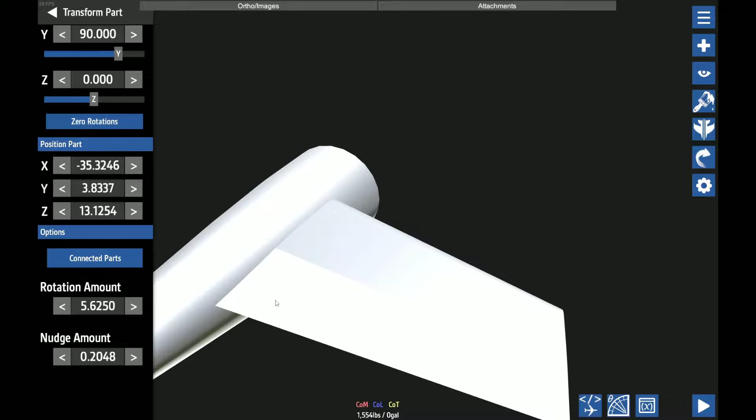So now, the first step, adding a control surface. Well, actually, first of all, I finish it, because we want to obviously get rid of this end here. Now, on the SWL-120's main wings, I obviously have that little winglet, but horizontal stabilizers, especially the tail itself, do not have that. Instead, we're going to just round it off.

We are going to have to redo the trailing edge piece that we just did. We're going to have to redo the rise and run, well, not really width, but rise and run. We're going to have to redo them for every single section that we're going to add. Because we're not evenly tapering it off, like if you're just adding a section to it, then we'd be tapering it off at the same amount. But since this is the ends of the wing, it's not going to be tapering off the same way.

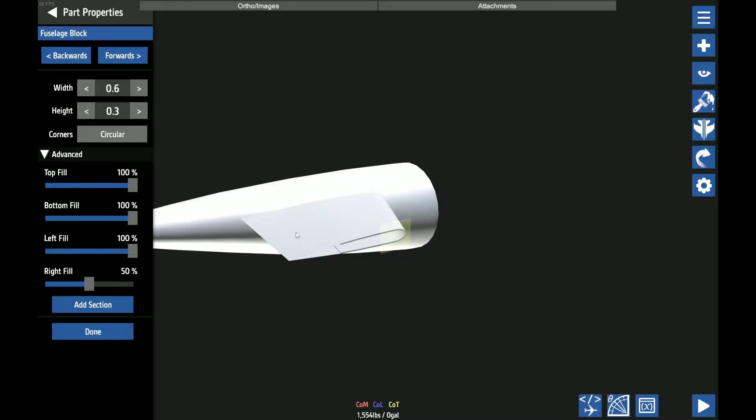The first thing I want to start with for this is a smaller section, like about that. Not that much rise. So we're going to start with this, and then I'll just add a few more sections until it's tapered off.

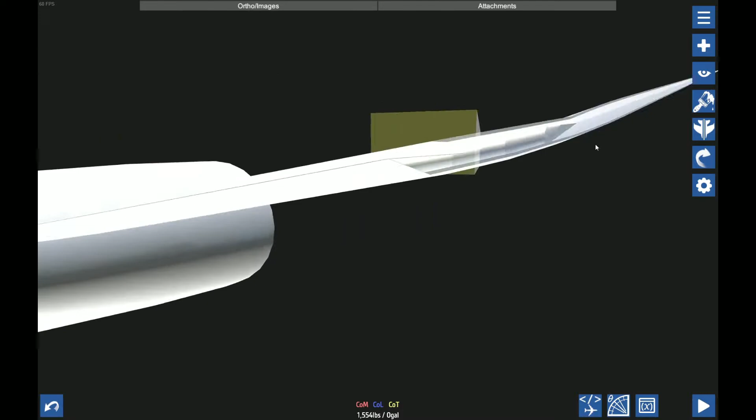So after some time, I've come up with the front part of the tip. However, that has had some problems with me trying to make the back of the tip because of how the height makes the width of the trailing edge, and therefore instead of just going out to here like I was hoping for, it instead has to go in and then does some weird stuff, then comes out or something, which is not ideal.

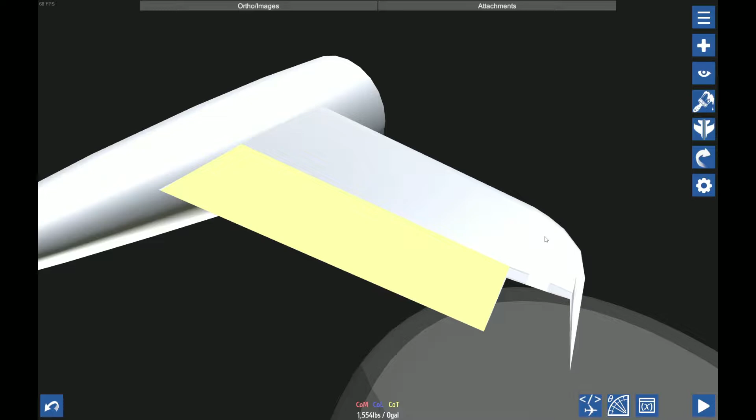I'd say for beginners, just ignore this tip of it, because this is going on the SWL-120. I will put this tip in, but I just say ignore if you're just learning. I focus more on the control surfaces and the actual wing, not so much the tip. Also, another important bit which I almost forgot, make sure to turn smoothing on, because you can see as I'm turning it on, it makes everything smooth.

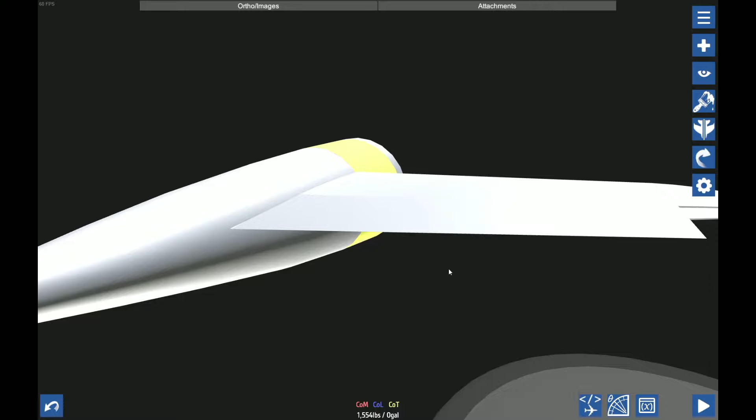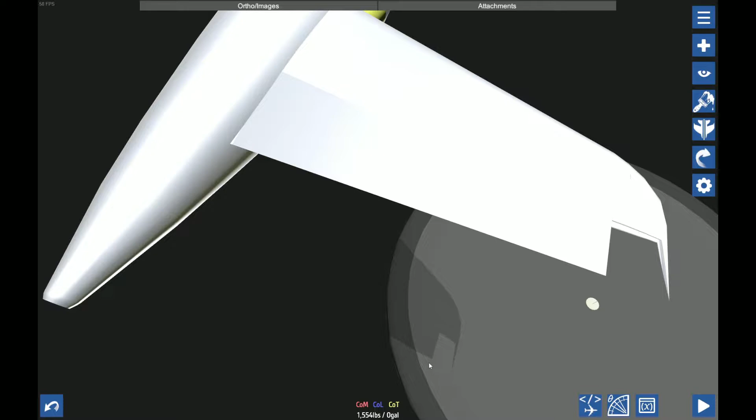Now, for the actual control surfaces, for a main wing, this will actually be flaps, and I guess there will be the aileron, but in the main wing it will be primarily flaps, which is the most difficult bit. Flaps and spoilers too. Now I may make a video on how to do that, but in this video I'm going to focus mainly on just making a control surface. However, for basic flaps, it's sort of simple, and actually I'll show you how you can easily add flaps to this wing after I make a control surface.

So first, figure out exactly where you want to put your control surface. For me, I want to put mine the entire length of this main segment, because it still has the tip to have some space, and according to my blueprints, it pretty much just goes right to the base of the tail. Really the base of the horizontal stabilizers.

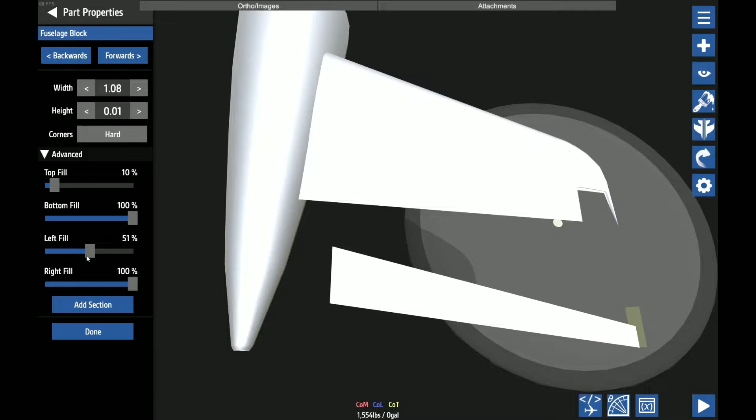What we're going to do is duplicate this top bit, and I'm going to slice out about 30%, well actually I think 31% of the leading edge. And then for the bit that's still on the tail, we're going to leave that there, we don't need it now. I'm going to remove its connection, that way we don't affect the base airfoil. Then we're going to slice out 69% of the trailing edge, which means our fill should actually be 31%.

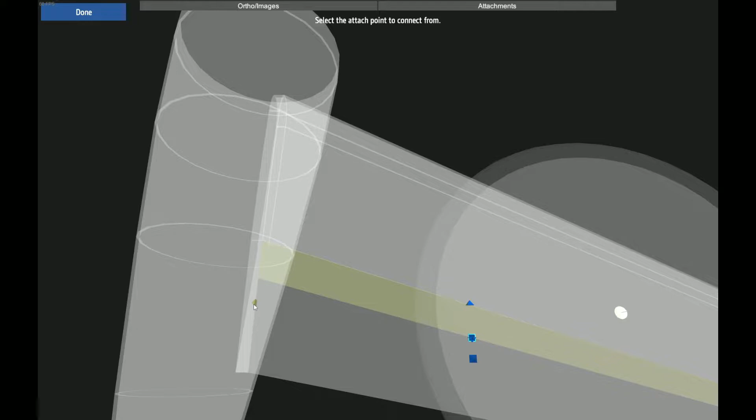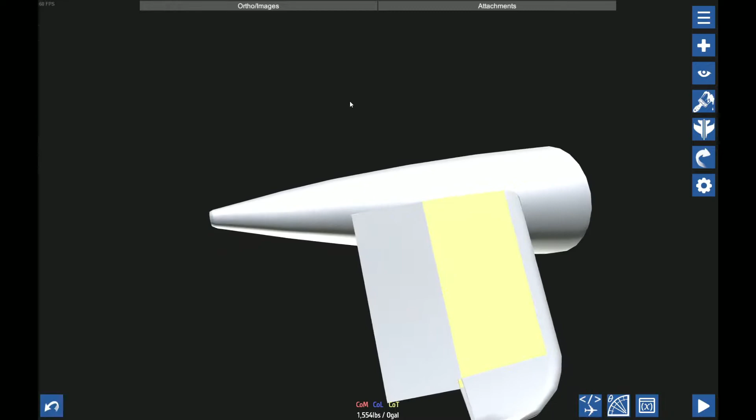And then since this bit is actually staying on the tail, we're going to re-add its connection, then we have this bit. These two show the exact same coordinates, so if I were to select this one, copy its position, paste that position in the other bit, you can see that it perfectly matches up, so you wouldn't even tell this is actually two pieces. Now going to nudge that out. I'm going to do the same with the bottom.

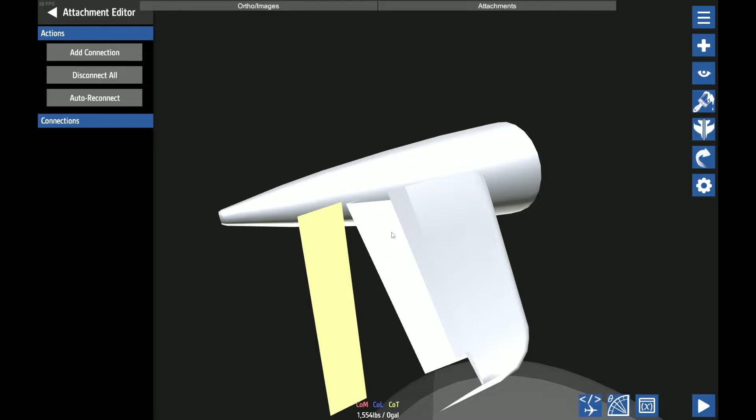Now, one thing for a semi-symmetrical airfoil we will have to do, really it's safe to do for any airfoil, is before we slice out the bottom bit, we're going to first make the leading edge of the actual control surface. Not the leading edge of the wing, but for the control surface, because the control surface is pretty much an airfoil in itself. So it's sort of like a wing within a wing, if you can understand that.

I'm going to start with the leading edge of the actual wing. I'm going to make its position be the same as the other part of the control surface. I'm just going to use the piece itself, not a copy of it. And I'm going to start with the base. Actually, I'll do the tip. So what we do is I'm going to go into orthographic side view.

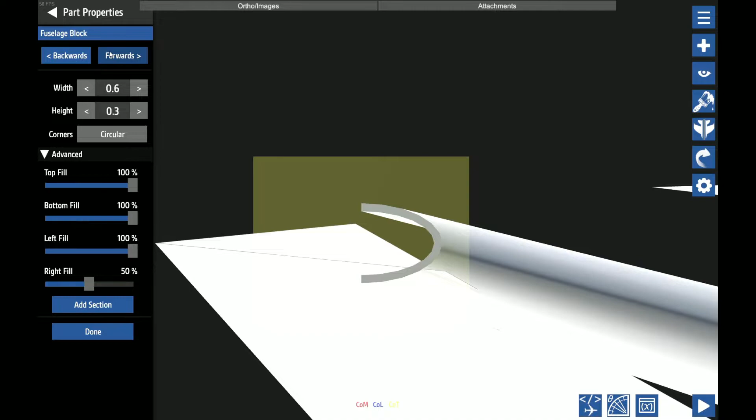And for control surfaces, now we could actually use the 5-part airfoil technique for the control surface too. However, for simplicity, and because it's what I've done in the past with the original wings, I'm going to leave it as 3 parts. Because you're not going to have a control surface within a control surface, right? Actually, we could technically use the 3 parts airfoil technique for this wing as well. However, my 5-part airfoil technique is better, because it gives us 2 flat pieces to work with for control surfaces, instead of having to figure out how to cut out the control surfaces from the 3 parts airfoil.

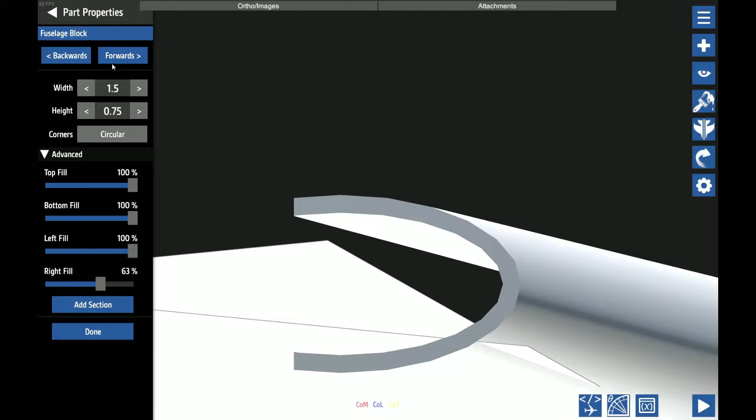So we're going to make the fill be 65, I think it's used in the other. I think 63 will work. That way it just has more of a round, because it doesn't just be at the front 50% and then immediately angle down in the trailing edge. 63 and 63. Then, since we're in orthographic side view, we want to try and align this corner with this corner here. And then we're going to nudge it up so it looks like the control surface bits are roughly halfway inside it, really roughly in the middle.

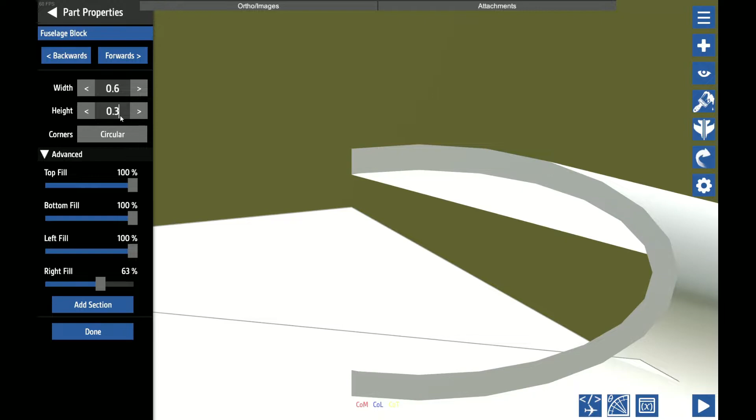Then we're going to decrease the height. We're going to deal with the width later because we want the width to be exactly twice as much as the height. And now I've done the height, I can change the width. And then we can nudge this back in place. And I'm pretty sure with the lower section of the airfoil, because it's a symmetrical airfoil, we can simply just make its fill be exactly 63%, and that will be perfect. Just like with the top, we can make the copy's position be the same as the existing one's position, like that, and then nudge it back.

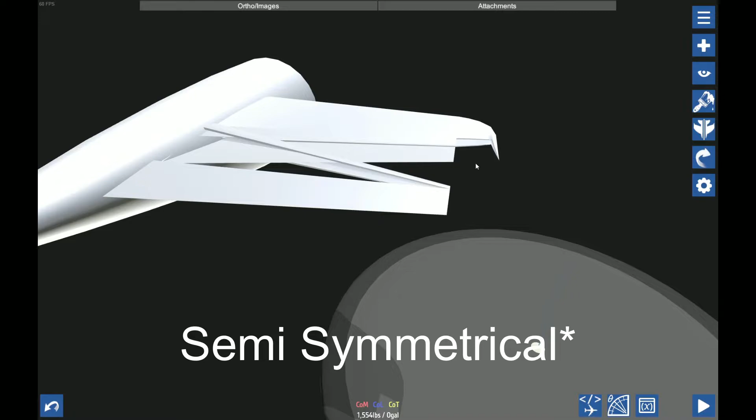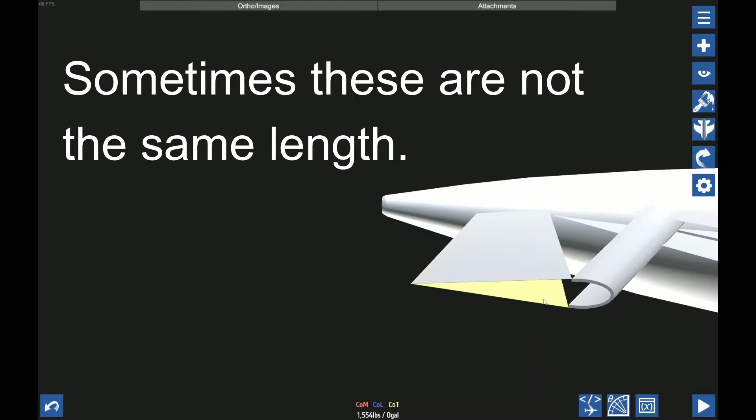And yep, like I thought, since this is a semi-symmetrical airfoil, 63% is exactly the right percentage for the top and bottom. The reason it's not the same for a non-symmetrical airfoil is because, like I was showing you before, the width of the top middle piece is not the same as the width of the bottom middle piece. So basically, with these 2 trailing edge pieces, the bottom one is longer, like the width of it is longer than the top one. I just want to make sure of how it's connected.

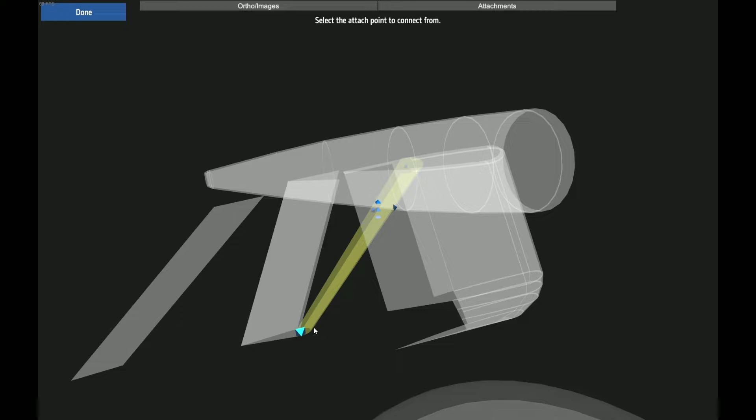We don't want to have any floating bits without a connection, because of what will happen. Let's say I have this bit here, if I were to adjust the run. Actually this isn't connected either, I just want to connect it by the tip, because that's what we've just finished. So the run of this is adjusted from the tip, not including the tip, that way the tip stays in place. But also, you can see this piece with no connections does not move at all, which could mean it will easily become out of place if this was an important part we had fine-tuned into place.

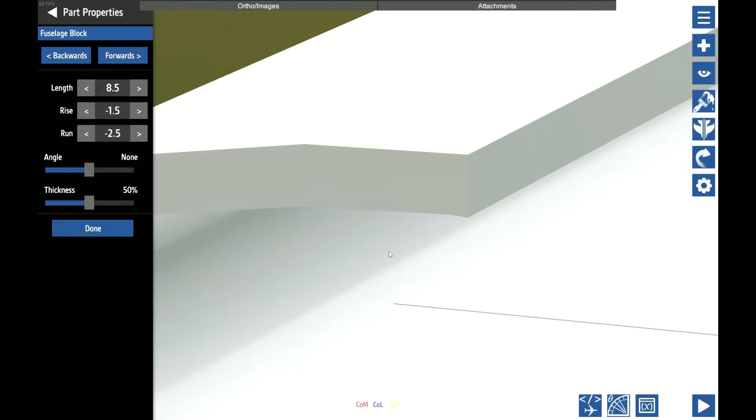So we've done the tip, now we're going to do the base. Because of how orthographic side view works, we want to avoid clipping, so we're going to have to nudge all the parts to the other side of the map. Not really map, but the other side of the designer. That way there should be no clipping, and there's no clipping. Okay. Now we are going to adjust this. We're going to start with the rise. So actually, first you want to make sure the run is correct. So I just use a bit of rise to get it into place. Then I can adjust the run until it is perfect. This will take, again, more fine-tuning.

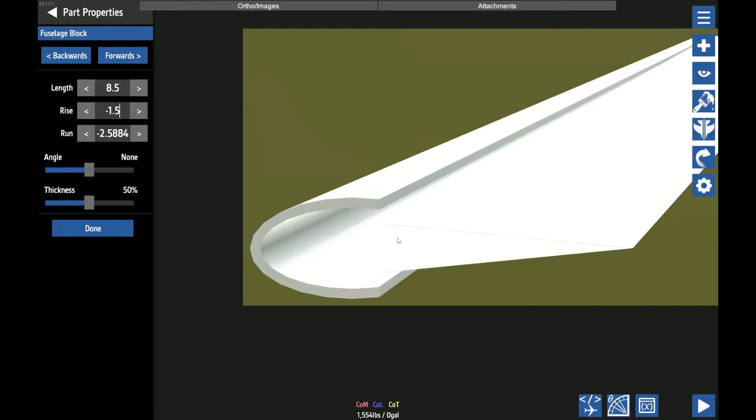Then I can adjust the rise until the trailing edge of the airfoil is exactly in the middle of the leading edge. And then I can change the height of the leading edge, similar to how I did the tip. Actually, I seem to have got it perfect without much effort. Now I can just change the width to be exactly twice as much as the height. Then I can use the run to nudge it back into place. And done. So that is our airfoil.

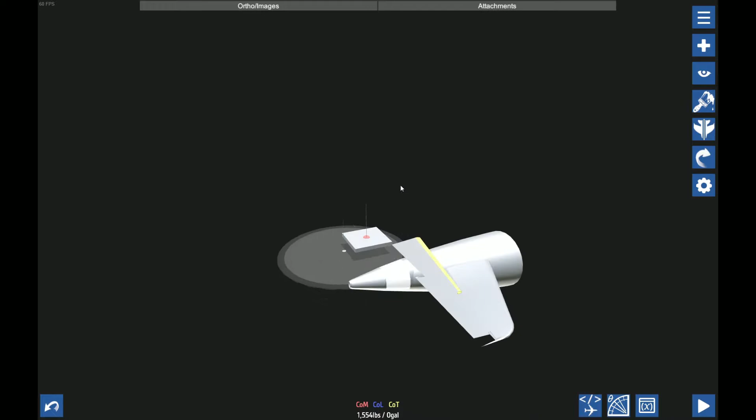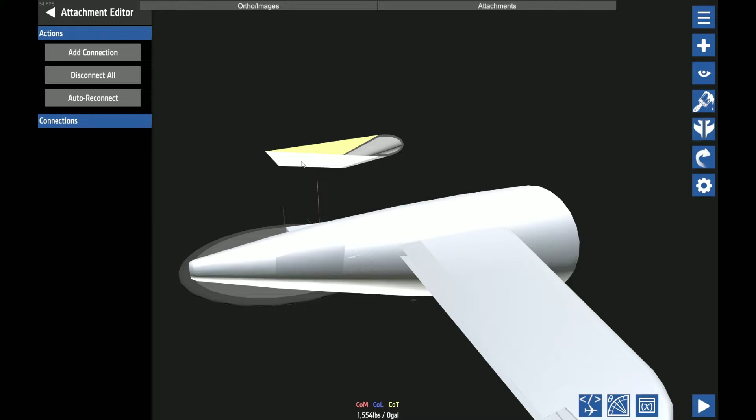So now we can just cut out a percentage of the bottom part of the trailing edge, 69%. Well, actually that would mean it's 31%, so fill percentage is 31%. And then we can add its connection back. And now what I can also do is remove all the connections from the airfoil's parts, and then add them to the leading edge. So that way I can use the leading edge to move all of the parts in the airfoil. Then I can nudge it back into place.

Now having this control surface is great, but what makes it rotate? Well, we need to add a rotator. And also, the thing with having the fill percentages as they are, making the control surface perfectly flush with the wing so there's no gaps or seams, so it's completely seamless. That does have an issue where if we rotate the control surface, part of it will clip through a bit of the wing, and because of that we need to actually cut out part of the wing right in front

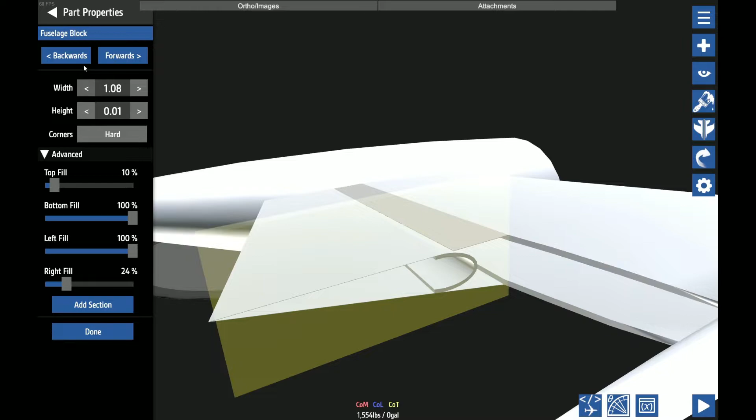of the control surface. To take this bit, I'm just going to move its connections again, and then what we need to do is cut out a bit, I think fully 24%, so for that, it just needs to be enough so when the control surface is fully deflected, say up, it just is about to start clipping with this highlighted piece there. So with flaps, we don't need to cut out the top bit, we just need to do the bottom bit. However, for control surfaces that rotate both ways, we need to cut out both sides.

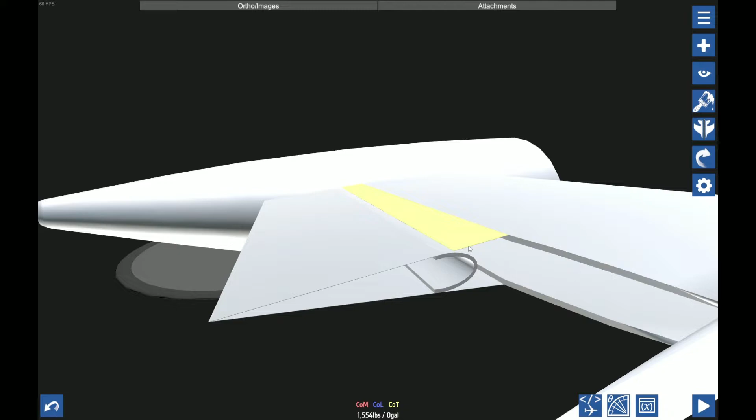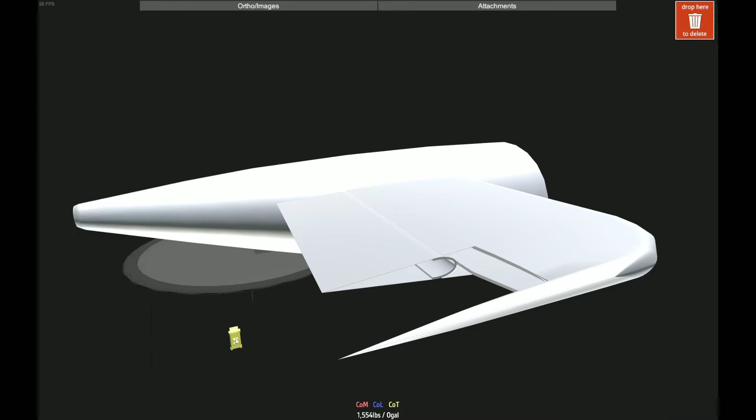So I'm going to start with having the fill percentage of the bits in front of the control surface to be 24%. Actually, I can just overload that, so instead of playing around with the connections, I can just make it be 24%. So now we're going to add a rotator. I'm going to use a hinge rotator. It's going to add a bunch of parameters to it. I'm going to make this be pitch. In joint rotator, I'm going to just make this 45.

Now, some of these values I can adjust in the settings, but I just prefer to do this all at one go and overload. This is actually going to be 0.7. I'm also going to disable the base mesh. This just disables some decorative 3D mesh on the rotator. We're going to set this to true. You can see it no longer has the mesh around it. And actually, for our purposes, we do want this to be on, so I'm just going to get rid of that. Now I just need to nudge it about in place.

And actually, now that we're done using orthographic view, we can nudge all the parts back together. I'm just going to finish adding this rotator. So I want to nudge it to be just, and actually I'll make it be the same position as the leading edge, so same height and the same z-axis and the same, what is it, length? I guess it is length anyway. So now it's in there.

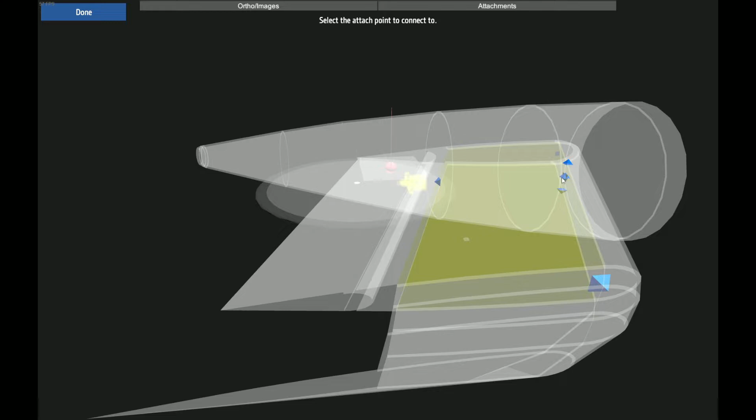I'm also going to just quickly add some connections, so I'm going to connect it to, I'll say the middle piece, and I can also move the connection of the leading edge to the wing and make the leading edge actually connect to the rotator. And I'm just going to make all of the locations of all the different parts the same, so all the parts aren't spread out. Now I have a rotator, and without changing anything, let's see how it runs.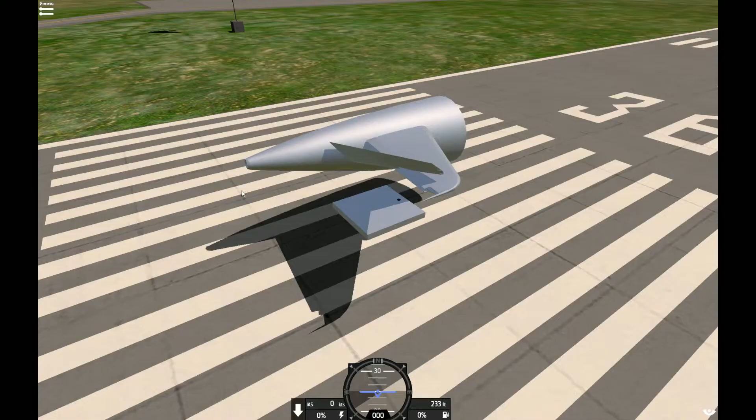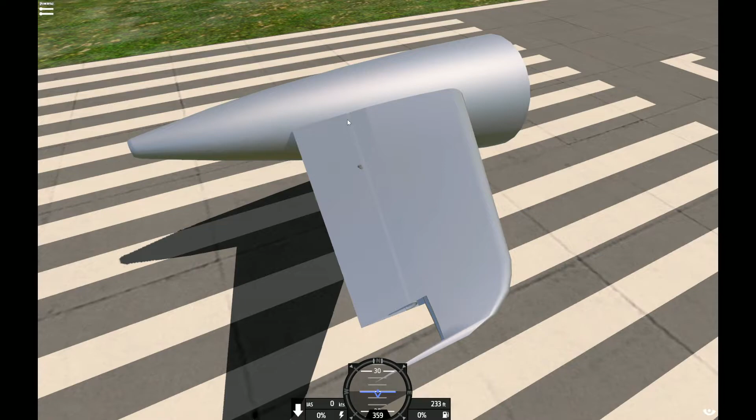So you can see already this is not the behavior we want. We need to rotate the rotator on, I think, all 3 axes, well actually just 2 axes, to avoid this weird behavior where the control surface does not rotate how we want it to. And also, a bonus on the first try is it does deflect the way we want it to. So let's say I want the plane to pitch up. The expected behavior is the control surface deflects up. And that does happen here, so I don't need to change that simple invert. We do need to fix the rotation axis. We want the rotation axis to be the same as the imaginary axis that the leading edge follows. But we're getting there.

So far I've made a wing, a basic control surface to go with the wing. I've also decided to attempt to make the edge. But I think for beginners we should focus on the middle part of the wing, which is really the main part of the wing, and control surfaces.

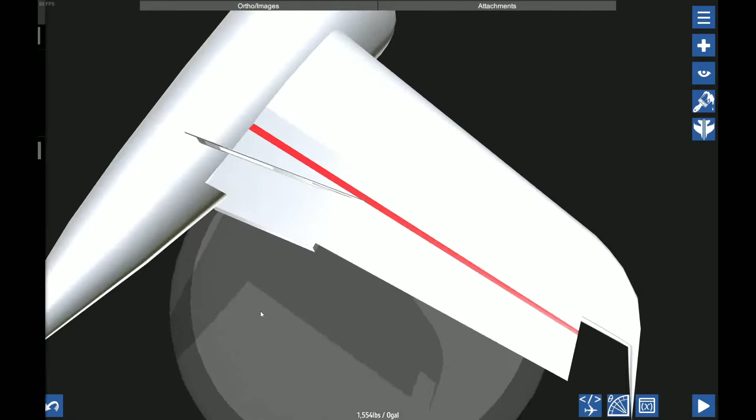So let's fix that axis. We want to scale up the rotator. We'll just try some values. We don't want it to be that. Actually that can be 0.1. Let's try this one. That's what we want. So let's make this one actually be more like 20. Right, so this is our axis. I'm also going to quickly just paint the leading edge red so we know exactly what we're rotating it to.

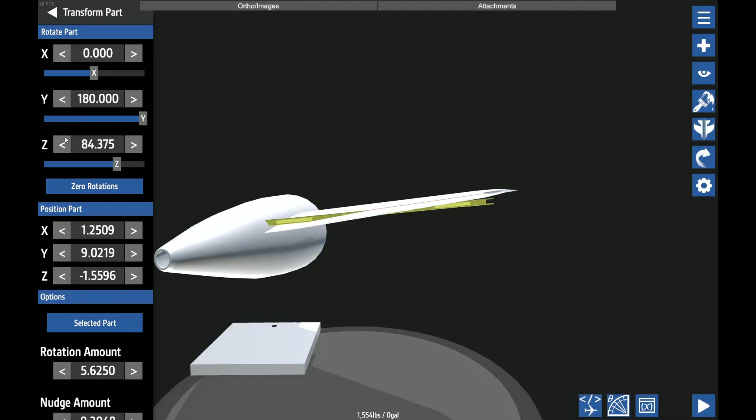There are 2 parts you want to rotate. First you want to rotate it. I'm just going to quickly try that now. You want to rotate it so the Z rotation is as close as we can get it to the same axis as the rise of the wing. I'm just going to fine tune that. We're going to use smaller and smaller rotation amounts as we zoom in. I want to try and get it as close as we can. About that. And actually let's see how it lands in the level. It doesn't look much different.

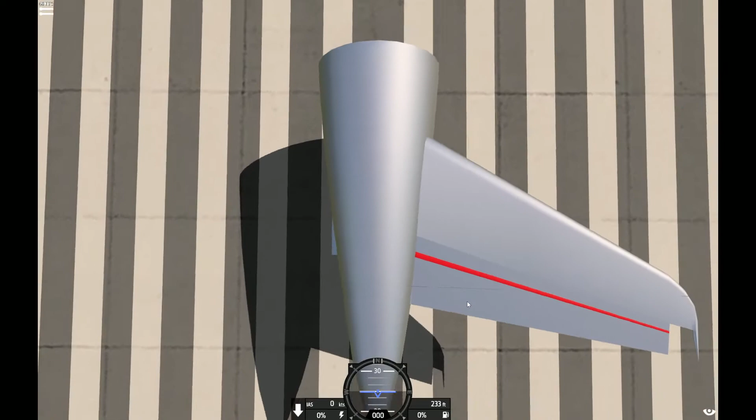Actually I can't tell any difference. But that one step has done part of it, that's part of the step. But it's mainly fixing the other axis, which is to make this edge be about here somewhere. So go to the top view, select the rotator, and we're going to use the y-axis. The x-axis is not an axis we need to tamper with. We're going to use the y-axis and z-axis.

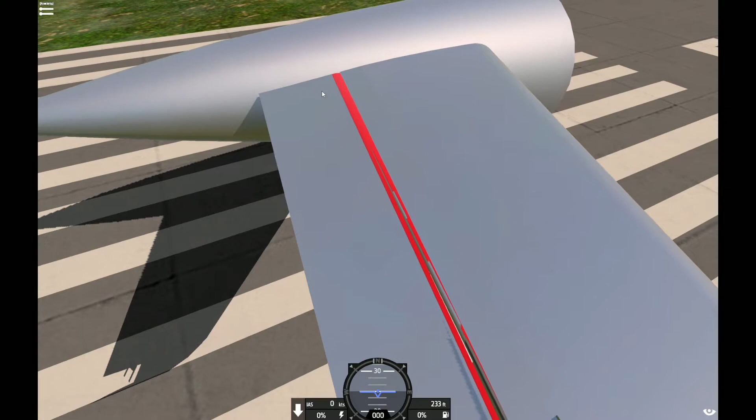Let's try that. I don't think that's 100% done. Let's just see how it went. Much better. Does need a little bit more fine tuning, but yeah, this is much closer to the axis we want it to rotate on. And actually, what we really need to do is just move the rotator forward a bit. But we do need to change its rotation axis a bit. I think we need to move this end back a bit. I'm also going to move it forward a bit. Much better. We do need to fix that clipping there, so we need to move the rotator forward even more.

It's still not perfect. You can see at the base it's exactly how I was looking for, but on the tip there was quite a big gap. Just needs more fine tuning. Yeah, I've got pretty much a control surface. Gonna go and keep fine tuning that. A few minutes later, and after a lot of trial and error, now this. It could probably be improved a little bit more, but I think it's good enough. I guess I could just do a little bit of clipping. Yeah, the bottom needs to be fixed a bit.

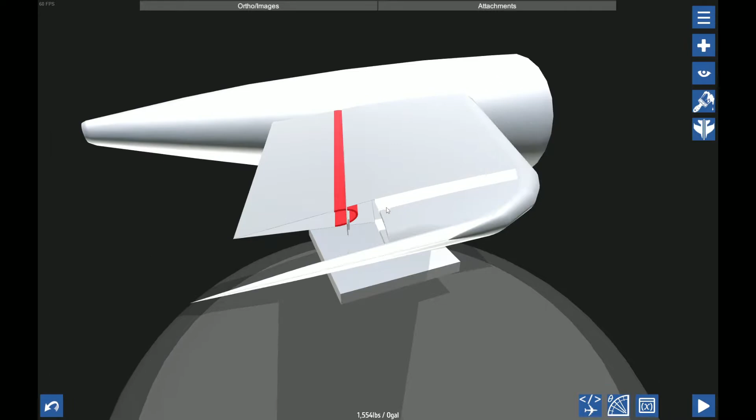And also, I want to explain how we're going to cap off these ends so it doesn't just look like a hollow piece, and also how we can add some more parts to make it look even more detailed. So 22%. So I'm going to do 22% on the bottom as well. I can also make this not red. I'm just going to paint this completely white as well.

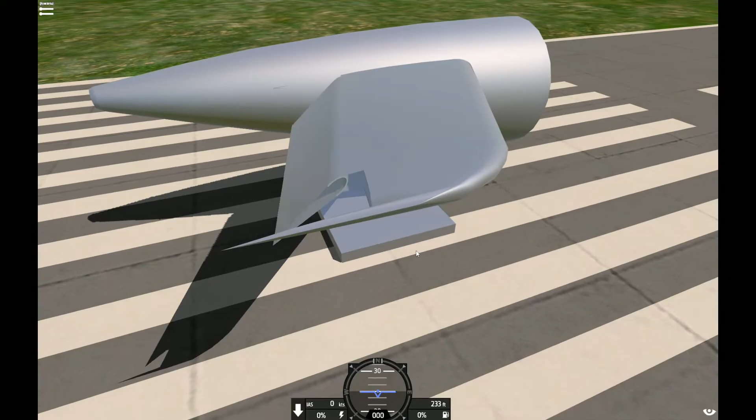So in this rotator, we can now make this 0.1, 0.1, 0.1, and then disable the base mesh in the joint rotator category. I don't think the rotator will be showing its mesh because it's so small, but either way I just want to have it disabled. So you can see it's right in there. And there we go. What I will do to make it a little more realistic is first I'll make its range more like 35.

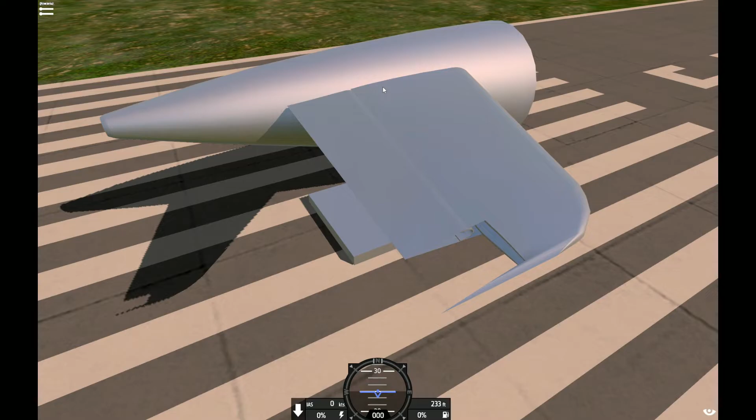And also add another category called damper multiplier. I'll set this to 10,000. I think 1,000 will actually be better for the damper multiplier, but we'll see. Yeah, I think 1,000 will be better, so I'll just set 1,000 for that. Yeah, this looks much better. So actually, I'll set something like 3,000, not 1,000. Yeah, much better. So there we go.

It's not done yet. The control surface is sort of done, but we just need to add some more parts to it. So we're going to cap off both ends of the control surface. We're also going to add a small part which really just walls off the hollow bit of the wing in front of the control surface. The caps are relatively easy. We're going to start by getting, I think I'll take this piece. We're going to rotate it so it's lengthways with the actual fuselage.

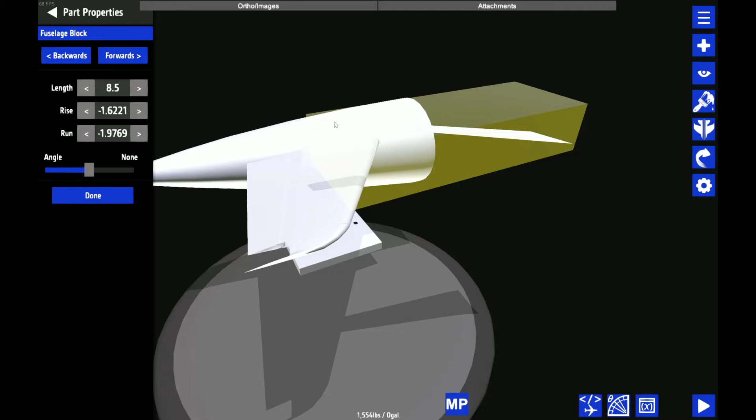I'm just going to take off the visor. We want the width, so actually we want the fill. I'm just going to set the fill. So we want all these fills to be 100% for now. The width we're going to make as thin as possible. I'm just going to set the height to 1 for now. The width is going to be 0.01.

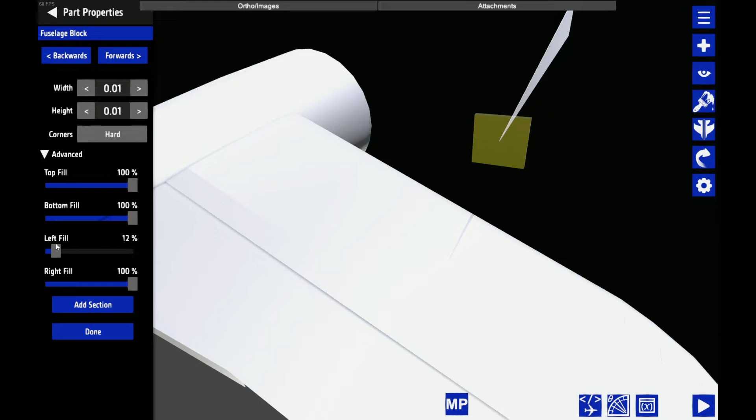Then I'm also going to use my trick to make it even thinner. This is the wrong way. So the left fill should take off the left side. Right. I'm going to take off 90% of the left fill, making it 10%. Same for the front. I'm also going to roughly scale it down to what I think it's going to be. So 1.1. Front height can be, I think, 1.0. So you want something like this.

We're going to, of course, change the look of this again. Basically, I just want to have this, and we also want to make sure there's no other rotation. Basically, a blank flat piece of fuselage like this. Now we're going to nudge it into place. And before we add this piece to the control surface airfoil, we also want to cap off the leading edge of that control surface.

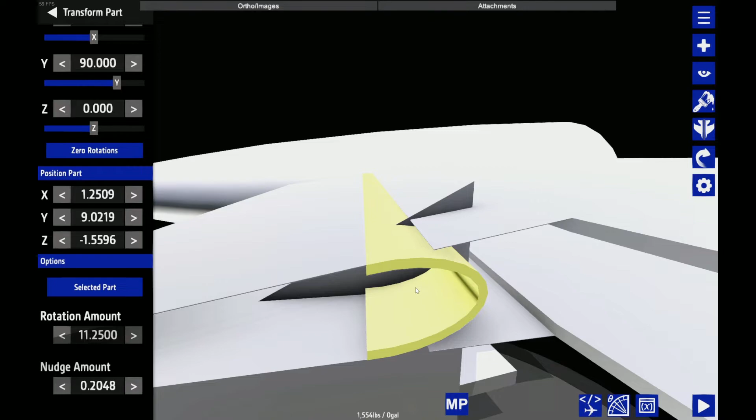Now we could use this piece and keep adding a few more segments, but there's an even better way to do this. We're just going to go into overload after selecting this leading edge. Then we're going to change the part type to be fuselage body 1.

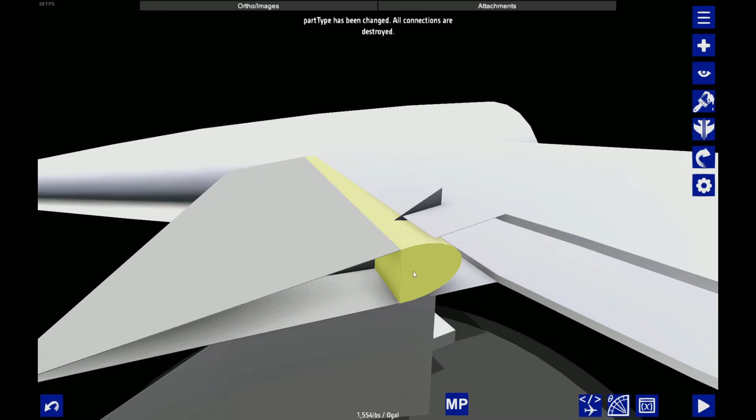And then it will be filled in fuselage and not being hollow. We also fix the connections because it'll erase all the connections. And done. So now I can focus on this triangle piece. I want to first nudge it out to the right position. So about there.

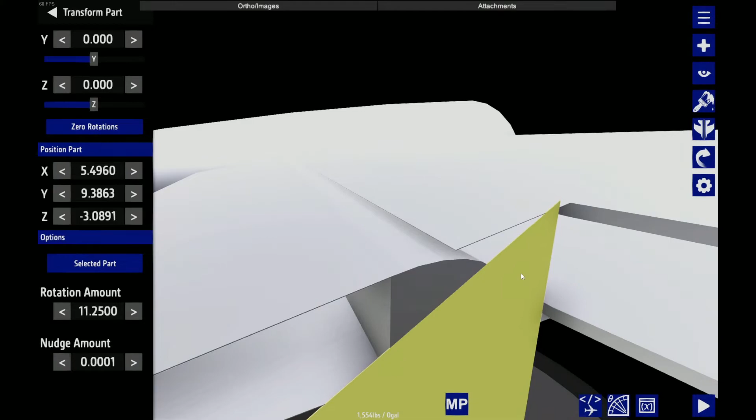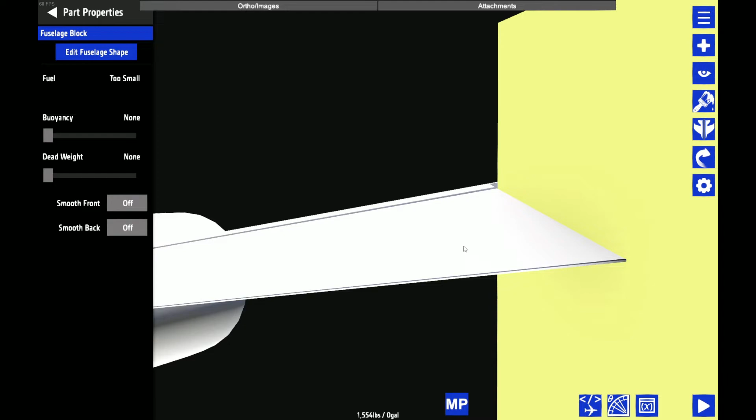Then I'm going to nudge it back until the front part, or the front edge, is in line with the back edge of the leading edge. About that. And then I'm going to make the Y position so it's just in the middle. It doesn't have to be exactly right, because even though we still want to be relatively fine-tuned, there's still the slight edge of the two rear parts of the airfoil, these two pieces here. So even though they're meant to be thin, they still have some thickness. So there's some room for error.

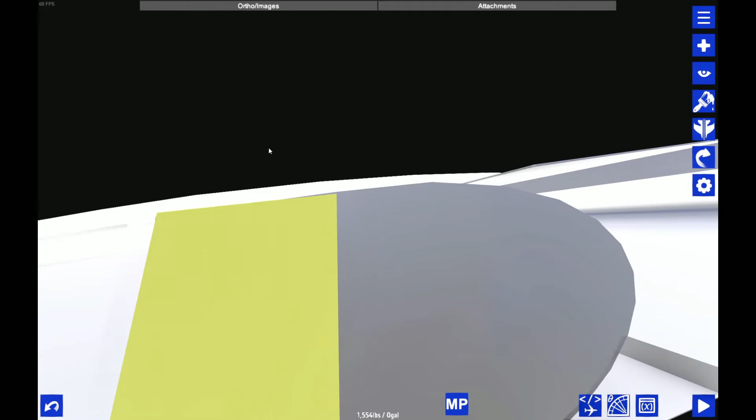So I want the height to be something like, not 1.1, 1.4 for now. And we can nudge it up, then fine tune it again. This is good enough. You can see there's still some slight difference between the height of the front part of this cap or end and the actual part of this airfoil here. But since there's some thickness here, it doesn't really matter.

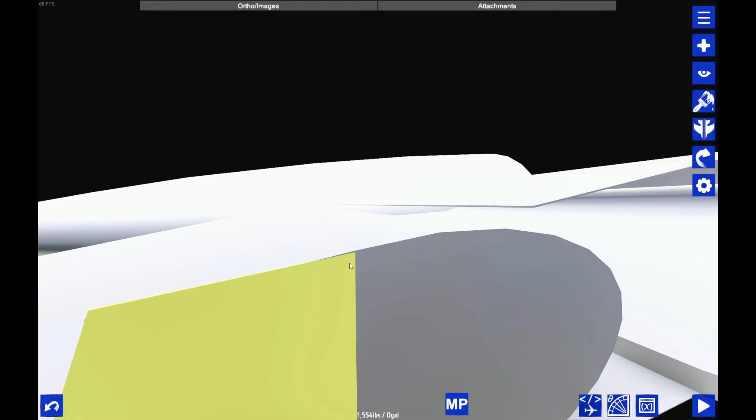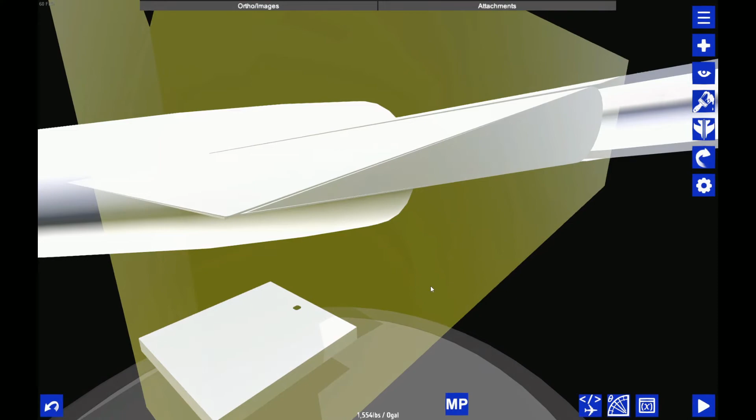Now we're going to add a connection. We're going to add the front connection of this end to, I'm going to say, the leading edge of the airfoil. And then we're going to change the length, and also going to use rise. The length will again need some fine tuning. I think we don't actually need to use rise, because this is a symmetrical airfoil. So there we go. So that's the right end of the airfoil.

It also needs to do the base. The base is the same idea as the end, so I'm going to do that off camera. 11 minutes later. And done. So that's the airfoil side of... Where did that go? Oh, I forgot to nudge it up. Anyway, so that is the control surface side of finishing up done.

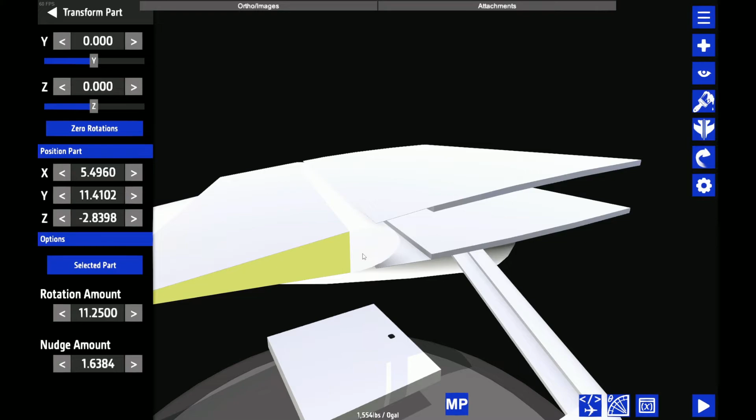Now I need to cap off, I think I'm just going to call it the inside of the airfoil from the outside. The way we're going to do this is first we're going to nudge, I guess we can nudge that up. We want to create an extra bit of cap, which is in here. But wait, first we're going to just make this part of the cap. So we're going to duplicate the leading edge of the control surface. We're going to make it back into hollow. I'm going to start by making it the same position as the actual leading edge.

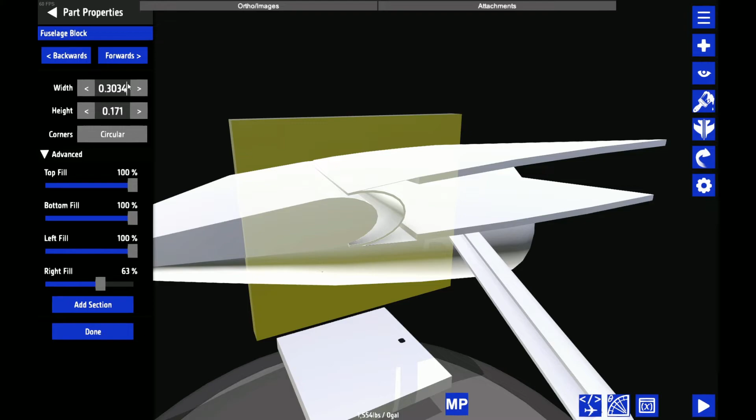And then we're going to nudge it forward until the back part of the new leading edge, which isn't actually the leading edge, is in line with the back part of the wing itself. Then we can adjust the height. This will again take some trial and error until it is flush. We're going to have to modify the base. I'll just do that, just a sec. And we can also actually take off part of the width of the end of it, so the tip, because we don't actually need all of that. So like this, I can nudge it back, like that. Hopefully you can see what I mean.

I also need to do the base, so I'm going to add a connection of the tip to, say, this part. Then I'm going to go to the base, and now I can use run. So first I'm just going to the base. I'm going to get rid of some of this width. Then I'm going to use run to adjust it there somewhere. Then we can increase the height a bit, and then we can change the run again. And just about done.

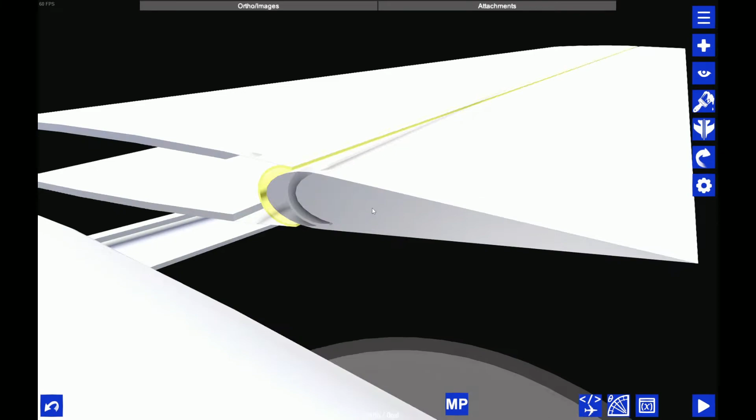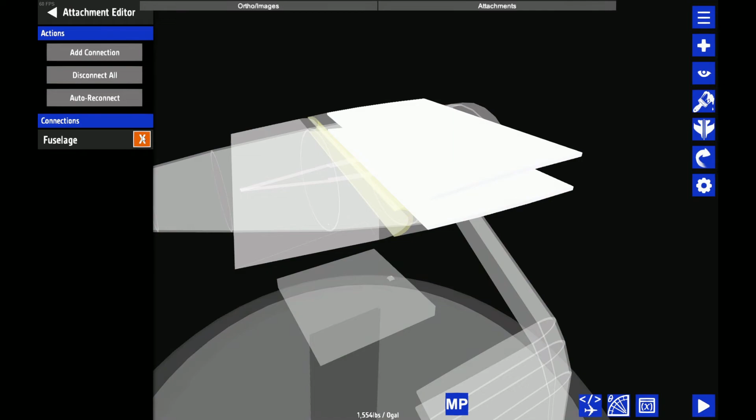Now I also need to cap off. Actually, I don't think we need to cap off anything. Now I do need to add an extra cap for this part, which isn't actually there yet. And we also need to cap off some other stuff. So let's just see how this runs in the level, like how the control surface rotates. It shouldn't clip with anything. That's pretty good.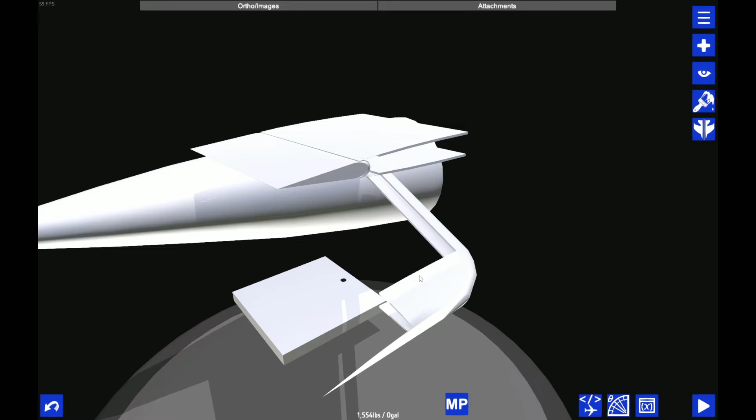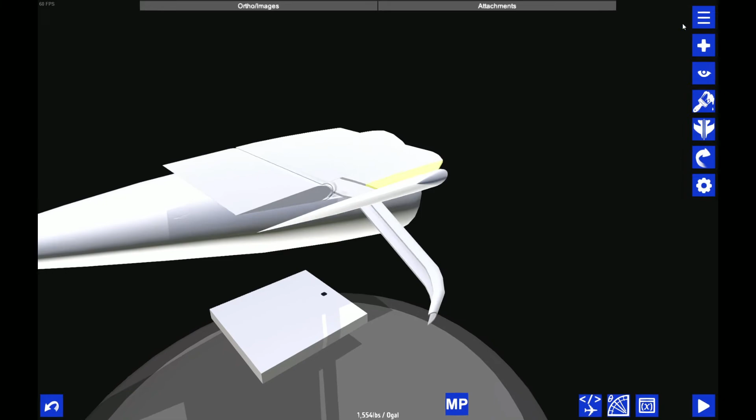So now I can move on from capping off the control surface's airfoil to the main wing. So see this bit here? So instead of this being hollow, we want to cap it off, similar to what we did in the base. One thing I also need to do is finish off this tip. I haven't done it because it's a little advanced. Like, not advanced, but it just takes a lot of trial and error. Because the height of each piece determines the width of the two back panels. So I'm just going to do a lot of trial and error. Many minutes later. And complete.

So now we're going to work on those actual caps. So what we're going to do is first nudge up some of the other parts. Then we're going to duplicate this end piece. We're going to make the positions identical. Then we're going to nudge the new piece up. We're going to set its back connection point to be, I don't know, anything. It can be anything. I'm going to say there.

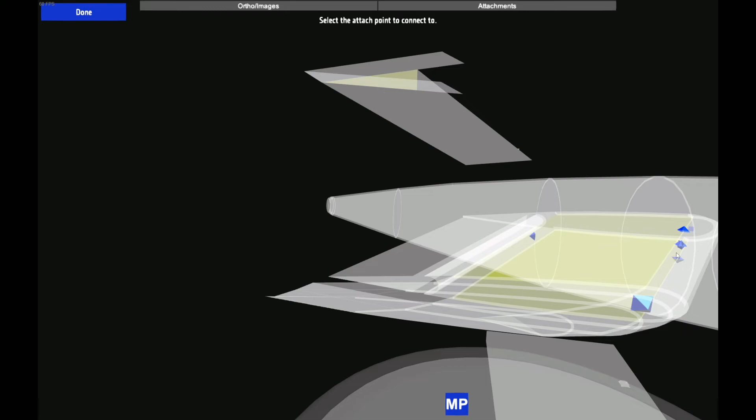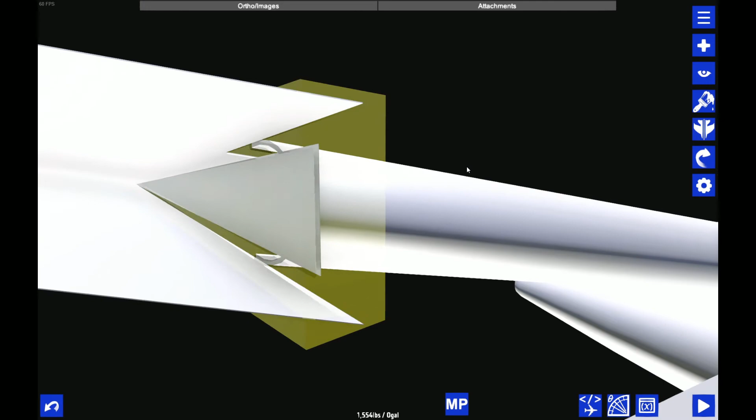And then what we're going to do is we're also going to get out this piece. And then we want to just extend this cap to be past the front bit of this other... There's probably names for all of this. Basically, we want the front of this piece, like this, to be past this piece. Then we can just adjust the height a bit.

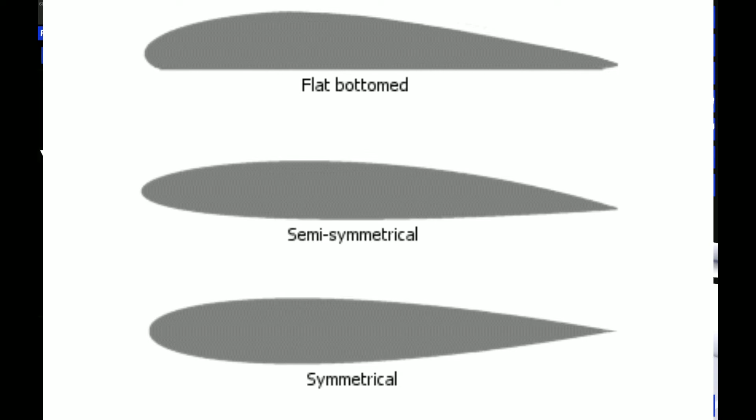Going to nudge up these two bases. Going to duplicate the other cap. Set its position to be the same. Set its back connection point to be anything. I'm just going to put it to here for now. And then set its length to be past the middle cap, about there somewhere. And then we can use height to finish it off. And that is basically done.

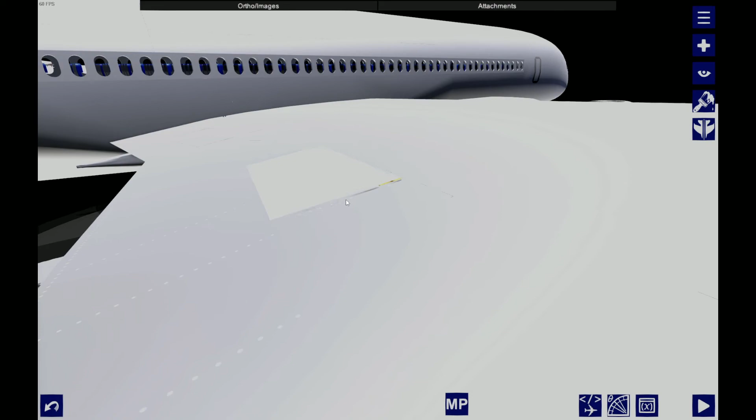So now we've finished the basic wing, but there's also some more stuff we can do, such as adding details. One of the easiest details is to add rivets, and since this is a horizontal stabilizer, there's not much else we can add. For example, on the SWL120's main wings, we have all the wing details, for example all these spoilers. Actually, let's load the levels and I'll show you.

So when we get the flaps extended and out of the way, we extend the spoilers, you can see there's all these details, there's the, I can't remember what these are called, they have a name. On the flaps we have these flap track fairings, we have some of the slot details, but this is all details for the main wing. The only detail we can really add to the horizontal stabilizer, the tail, is some rivets.

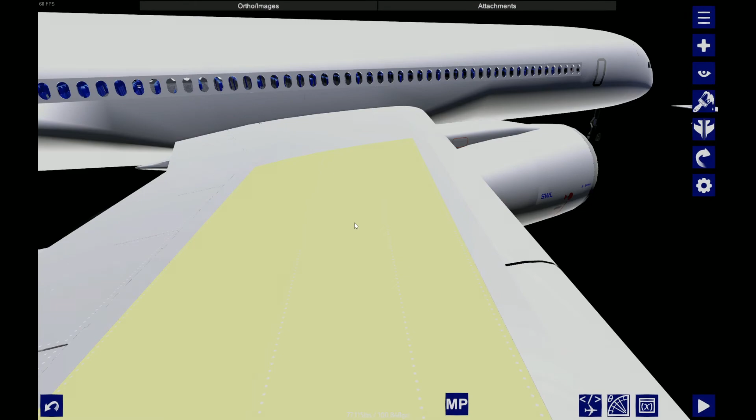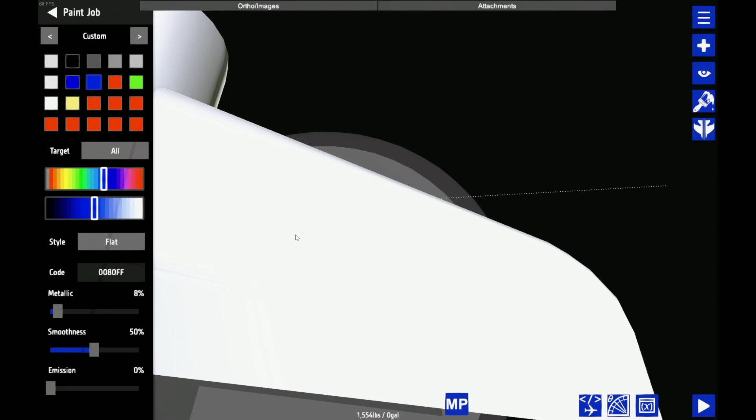To speed things up a bit, I'm going to just copy some of the rivets from this plane. I'll get this line. It's pretty simple to make rivets. You just get a label part, and then you put in a bunch of dots or spaces, and that's your line of rivets. You can see label, pretty simple. Just a bunch of dots and little bit spaces. And then I'm just gonna figure out where I'm gonna put them. I'm just gonna put the main lines here.

Actually the whole thing's optional I guess, the rivets are not really required for functionality, they're just an extra detail we can add. I'm going to add them. So you just have your line of dots, and you will have to adjust the actual length. And I'm going to say I want one at the front, one in the middle, and one at the back. So I'm going to put this at the front, about there somewhere.

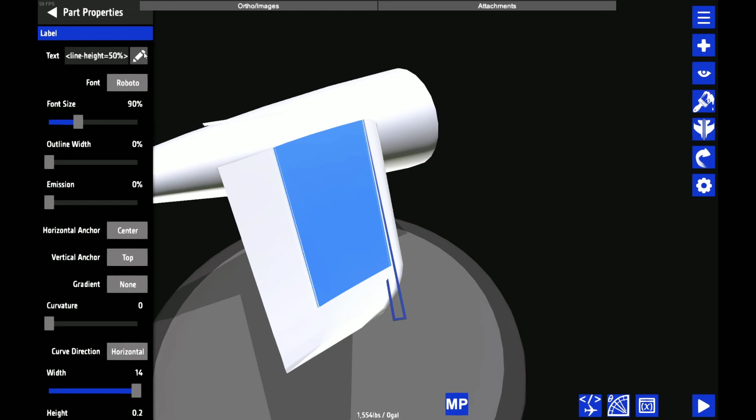And similar to the rotor, where we rotated that on 2 axes, we're going to do the same with the line of rivets. You also can use a 3rd axis actually because of the shape of the airfoil, this one, and that is the first line of rivets. And it's the same idea for the middle and the back, just a bit of trial and error, and adding and moving dots as required. And the rivets are added. And for this wing, that's all the details I'm actually going to add to it.

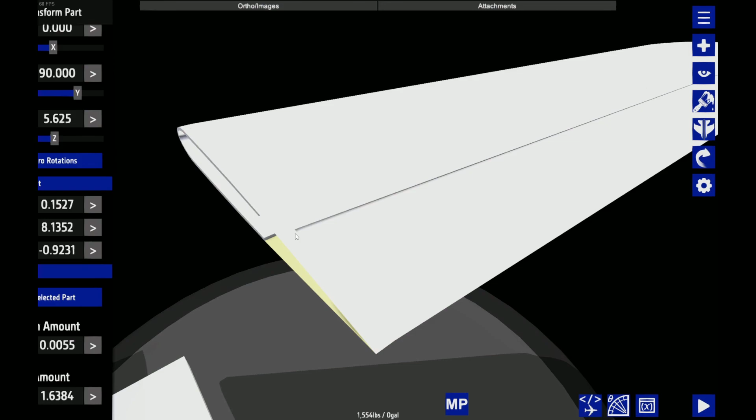So now what we can do is mirror it to the other side. To do this without breaking anything, we're going to first nudge it out from the fuselage. I'm just going to nudge down the other bits, just the one. And then with it away from all the other parts, we can select the root part that I've connected everything to, and then I can just mirror it.

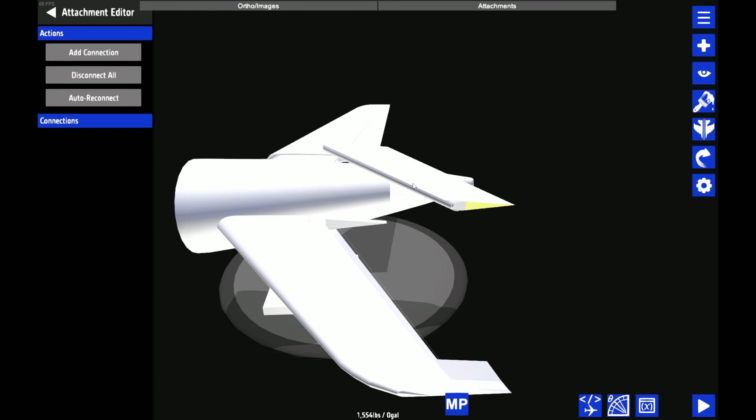Now of course all the connections are going to be messed up on this piece, so I'm just going to go into here and delete them all for all these pieces. And with all the connections removed, I can now go ahead and add them, but correctly. And that's all done. And now the horizontal stabilizers are complete. That will be it for this video. I might do the tail on a separate video, but I might just do it off camera, I don't know.